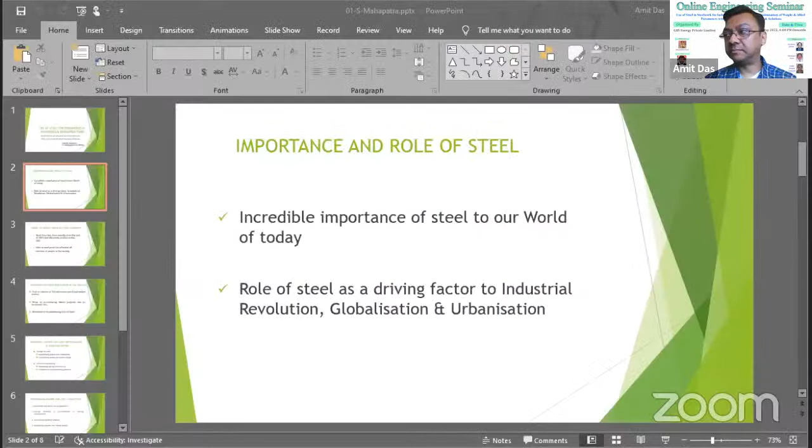As regards the role and importance of steel, it would not be an overstatement to say that the steel industry has always been at the forefront of industrial development and forms the backbone of any economy. Steel is said to be the wheel of the moving world, being the most important driving force for prosperity and welfare of mankind in this sustainable society.

But the worry is that the price of steel is rising very fast worldwide. Prior to the outbreak of COVID-19, the rise in steel price was there, of course, but it was steady, and it could have been predicted. It was very much predicted. But there has been an unprecedented price hike of steel during the last 2 years of the pandemic regime.

In certain countries, steel price had jumped to 200%, and hot rolled coil touched a record level of 300% increase. And as already mentioned by some of the speakers, in the Indian market, sections and bars have increased by more than 25%, and the increase of HRC is around 30%.

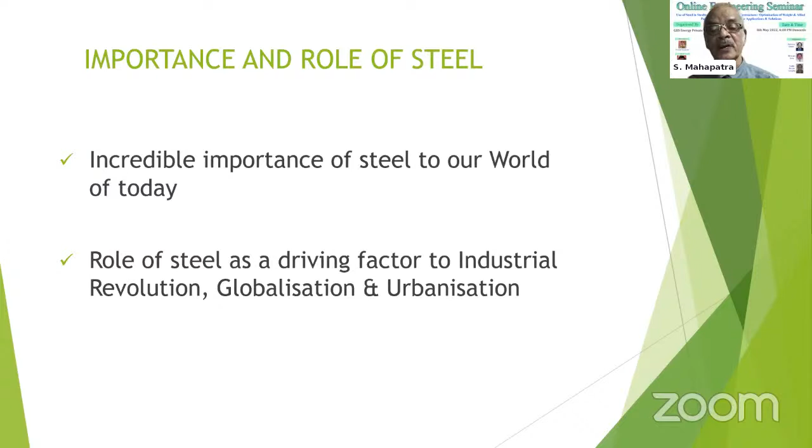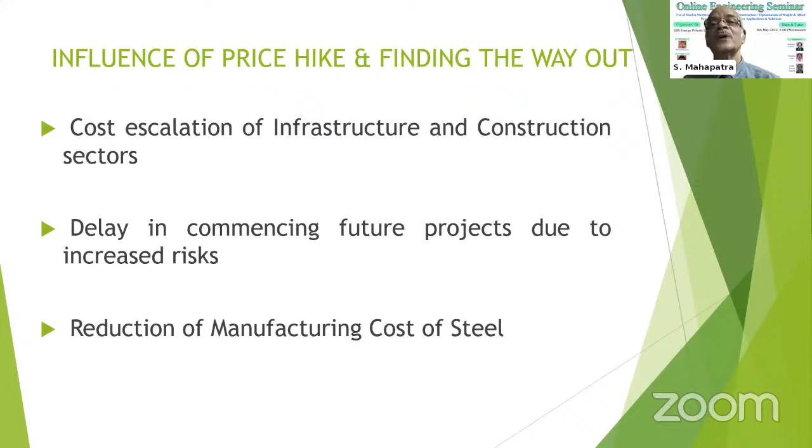So we can discuss what aspects contribute to bringing down manufacturing and production costs, the trend of rising price in the industry, and different aspects of cost optimization of manufacturing. Production costs are contingent on various factors, and finding the right ones for application of cost cutting, without damaging product quality or business reputation, is the desired methodology to reduce cost. Let's discuss some of these aspects.

Design and engineering: the design phase contributes significantly to the overall cost of the product. Optimization needs to be focused on engineering analysis, concept design, architectural design, and detail engineering. As regards engineering activities, using proper part tolerance - tolerance being the degree to which exact dimensions can vary - the optimization of tolerances saves material and reduces cost.

Another aspect is using hollow structures. Adopting structural elements such as ribs and gussets provides significant strength to thin-walled pipes and thin-walled parts. This will save a lot of material also, thereby reducing the cost.

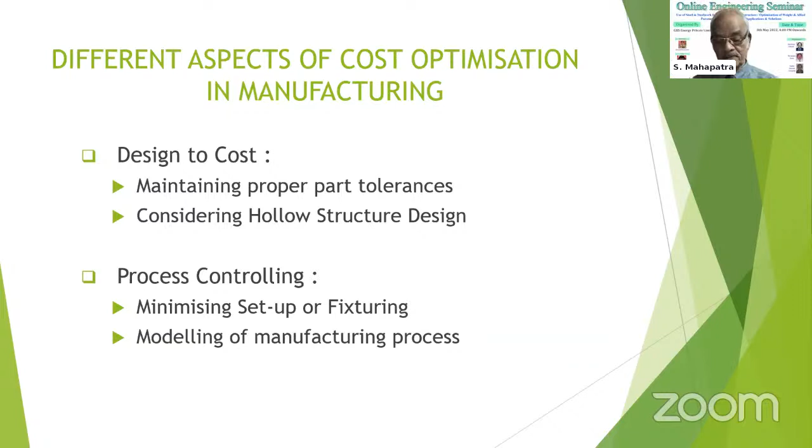That will save a lot of time, and so the cost reduction will be also. In addition to process and manufacturing, design and engineering, there are some other allied activities also in a steel plant which can be considered suitably for reducing manufacturing cost. One vital aspect is recycling and reuse of byproducts. Within the steel production cycle, several products like slag, sludges, scales, dust, etc. are produced, some of which are directly suitable for internal reuse, and others can be separated in a fragmented way for external use.

And energy auditing and optimization of energy consumption. The steel manufacturing processes are highly energy intensive. Share of energy cost in the total cost of production is quite substantial. So controlling energy consumption through carrying out the energy audit shall enable reduction of production cost substantially.

Maximizing the quality control. Main goals of quality control are to ensure customer satisfaction by delivering defect-free products and radical reduction of defect rates in production. Controlled technological processes are the most important way to reach these goals, and by way of that we can also save a lot of cost in manufacturing cost, particularly reducing the quality cost. Otherwise, the same thing has to be done again.

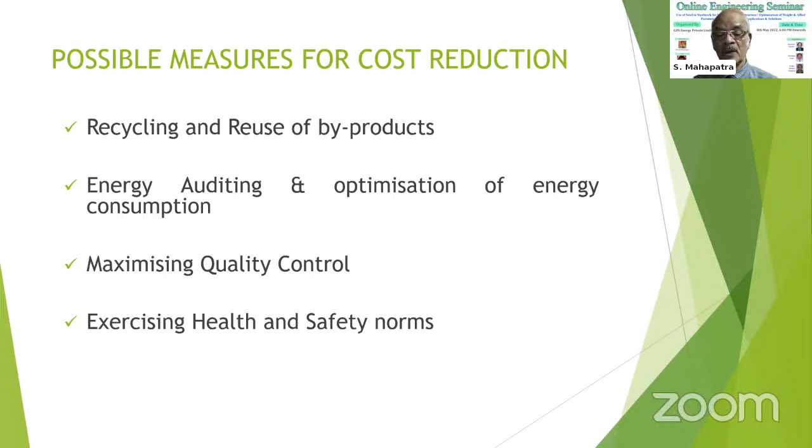Lastly, regarding price reduction options, to bring down the overall steel manufacturing cost, choice is usually either cost cutting or cost optimization. Cost cutting programs typically deliver short-term tactical gains; it's a one-time operation. Whereas cost optimization entails a systematic and sustainable method to manage priority costs, ensuring that operational capabilities of various functions are not affected. To conclude, cost optimization is a very efficient tool for managing production cost, ensuring effective demand management, better skill management, and better product quality.

This is the first thing which came to our mind: India is producing 110 million tons per year, and if we take around 60 rupees a kg or 60,000 rupees per ton, the value works out to 6.6 lakh crore, and 5% of that is 33,000 crore. This is material cost. Plus fabrication, transportation, and erection, totaling around 50,000 crore. So the main thing is 5% saving in steel weight, a rough saving in a year is around 50,000 crore.

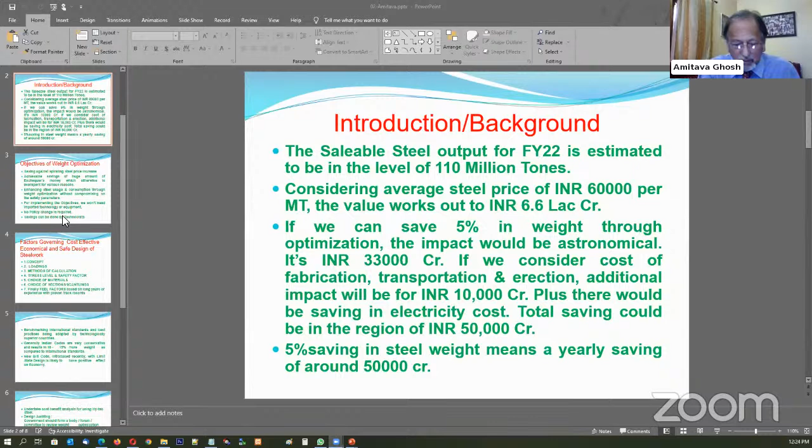So what are the objectives of this weight optimization? First, saving against spiraling steel price increase, which the other speakers have told. Next is achievable savings of huge amounts of exchequer's money, which otherwise is overspent for various reasons. The third point is enhancing steel use and consumption through weight optimization without compromising on safety parameters. Next, for implementing these objectives we don't need any imported technology or equipment. No policy change is required. Saving can be done by technocrats. In fact 5% saving, everybody will agree, is not difficult, you can do it very easily.

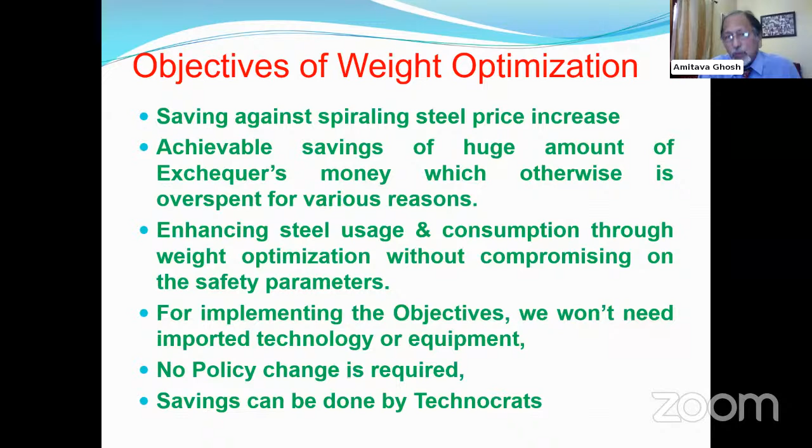So I'll give you the factors governing cost-effective, economical, and safe design of steelwork. How do we design this? The first point is concept. If we change the concept, we can do some savings. Like two isolated tall buildings, if we connect them on top, the weight goes down. Or in a modern power plant where the chimney, cooling tower and FGD are in the same place, with a change in the layout and concept we can reduce the load.

Next is the loadings. We consider loadings, and sometimes we consider more because we do not know. If we know the level of loadings properly, then we can optimize. I'll give an example. I have seen a container crane where the design is based on the value that the container is 75 to 80% loaded, because research shows that all over the world, a container is never 100% loaded. And if sometimes it is loaded more, the motor or structure can take that overload. This is how they are doing the optimization.

Next is method of calculation. Earlier it was manual, and now with software we do a good calculation and save. Next is stress level and safety factor. There is a permissible stress, and the stress level we can theoretically go up to.

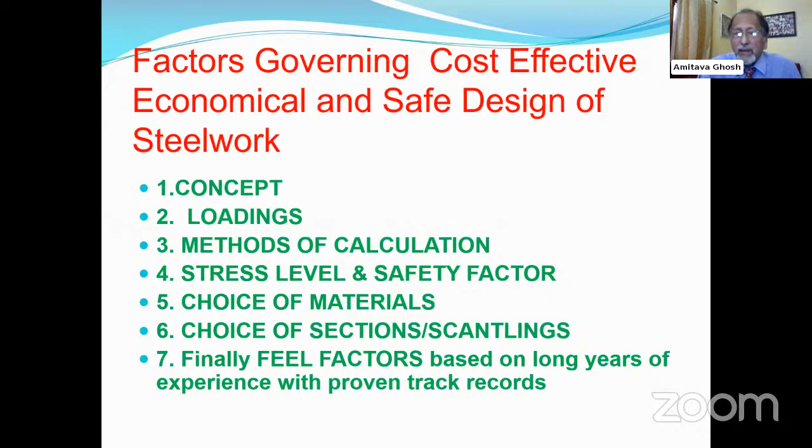And finally, the most important is the feel factor. The designer's feel factor is very important, what should you do. It is beyond calculation, whether this is okay or not. This comes with long years of experience with proven track records, like old doctors who, without investigations, could tell a lot of things. That feel for the whole thing is very much required to make it economic. We go to the next, Amit.

So, benchmarking with international standards and best practices adopted by technologically superior countries. Generally Indian codes are very conservative and result in 10 to 15% more weight compared to international standards. I have heard this when I used to go abroad. Those people used to say that now the BIS code is recently adopting limit state design, which is likely to have some positive effect on economy.

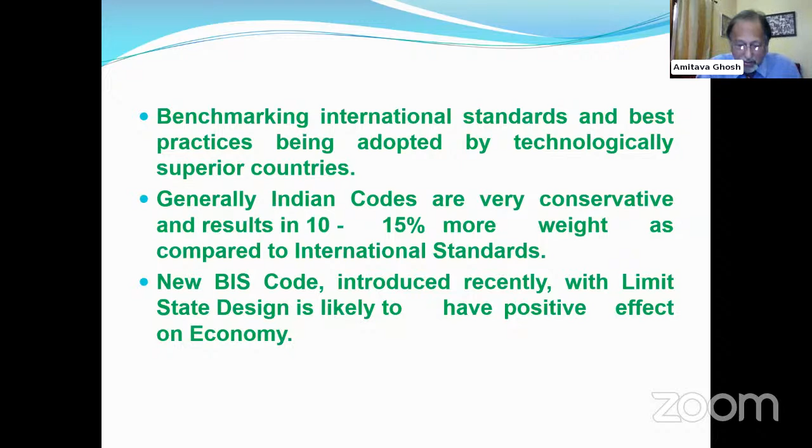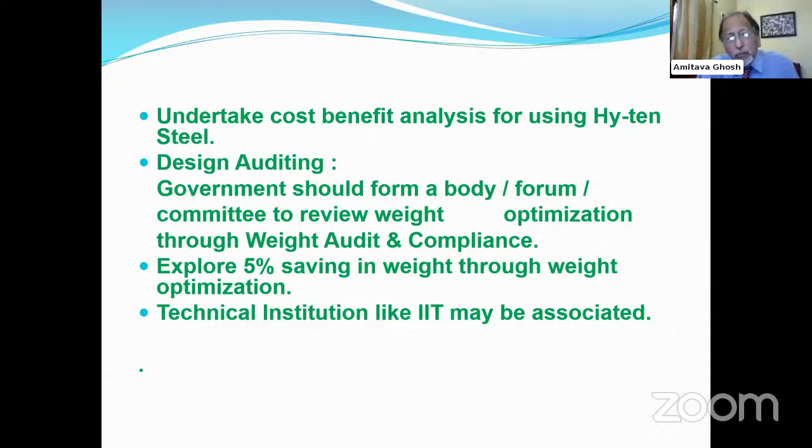So what do we do? I think whether the weight is more or less, one should see through weight audit and compliance and explore, not just a 5% saving in weight through weight optimization which is nothing. Technical institutions like IIT may be associated. Next.

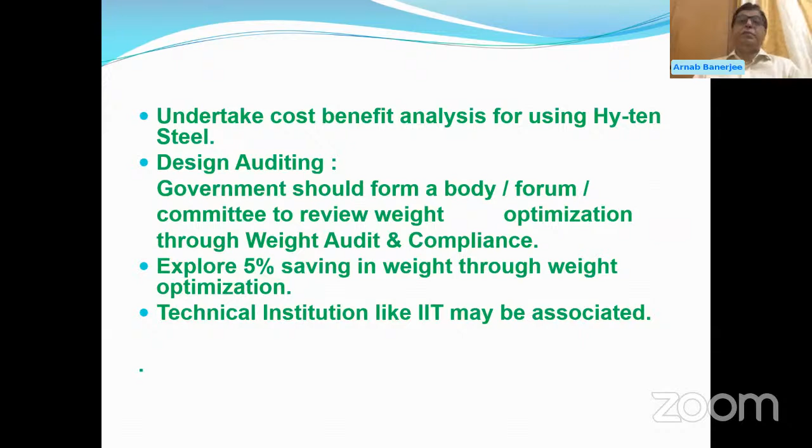Next slide, Amit. Slide number 7. Now I'll come to a very important point.

First of all, for critical applications, weight reduction should not be pursued. But we know this is the field of the designer, and this is the area where we can try and achieve it.

Believe me, there is no expiry date for weight optimization.

I can give you one example. In Purulia pump storage project, WBSEDCL could not give the site for 1 year. During that time, the hydromechanical company Mitsubishi utilized the time to do the work.

The most important and last point is that the mindset towards designers needs to be very positive and supportive, like in developed countries. Only then can we achieve all these steelwork savings.

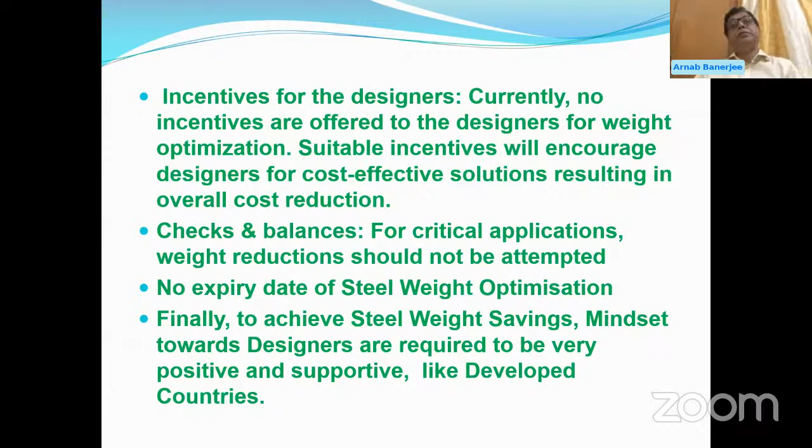The last point is about the people who will not be in favor of this. One is the consultant, who probably gets more money out of higher project cost, so they will always increase it.

Number two would be steel users or steel producers. They might think their steel sale will be less, but it is not true. If you see any retail market, every day they give discounts, but overall sale is more. I think if steel price level is less, there will be more use of steel, which we want.

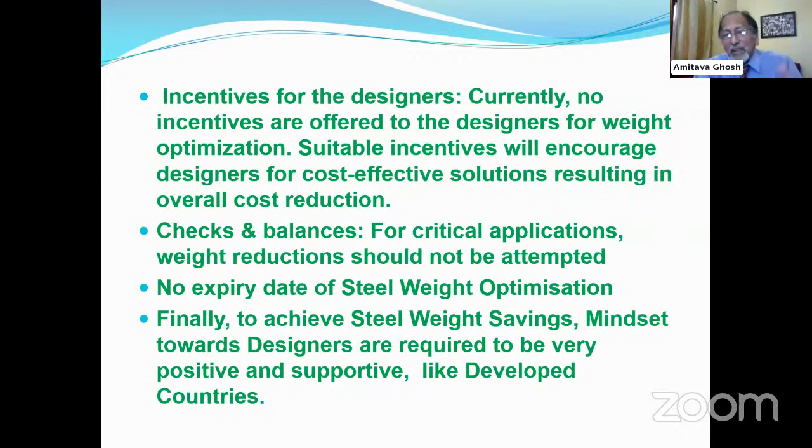So with that, I'd like to thank everybody, and next we can go to the next speaker.

In the meantime, what we understand is that everybody is positive regarding optimization. That is the buzzword, and that creates one thing: that we are not misutilizing any of the material, any of the time, any of the cost. That is what optimization says.

Now I would like to highlight certain points regarding design. Where are we at this very moment? How is India geared up for helping us in optimizing our designs from the codal point of view? Next slide, please.

Till 1984, we were involved with the method called working stress method. That was 37 years ago. And in 2007, 14 years ago, we were gifted with a new sort of design, which is called the limit state design method.

Why this change? The working stress method was quite foolproof, so why limit state method? The main objective, obviously, was optimization, not only of weight but of all other parameters which were developed at that time through research and development carried out by the premier institutes of India. So what is limit state?

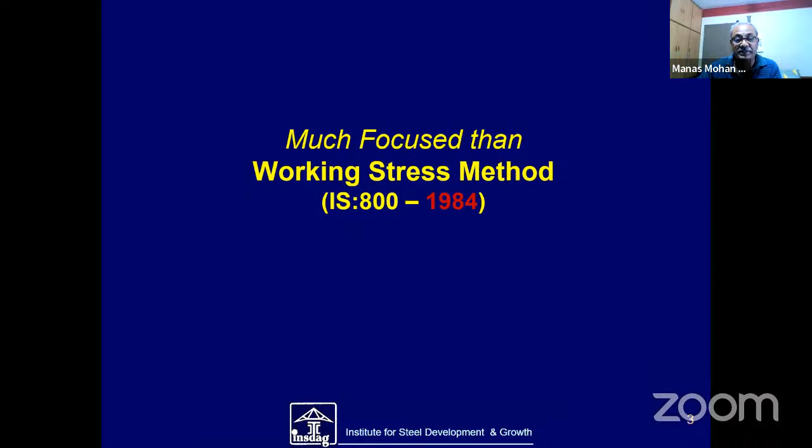Next slide. Limit state, we won't delve deep into it, but it is the result of advances made in structural steel design. These advances were incorporated into the code over the years, helping in a more rational and reliable estimate of the collapse load.

Whenever we design, what are the parameters? Number one is the uncertainties. If the uncertainties can be calculated statistically and probabilistically, and converted to certainties, then the solutions become much easier. So from working stress method to limit state method, this was a giant step in finding out the range of uncertainties to its extent. Next slide, please.

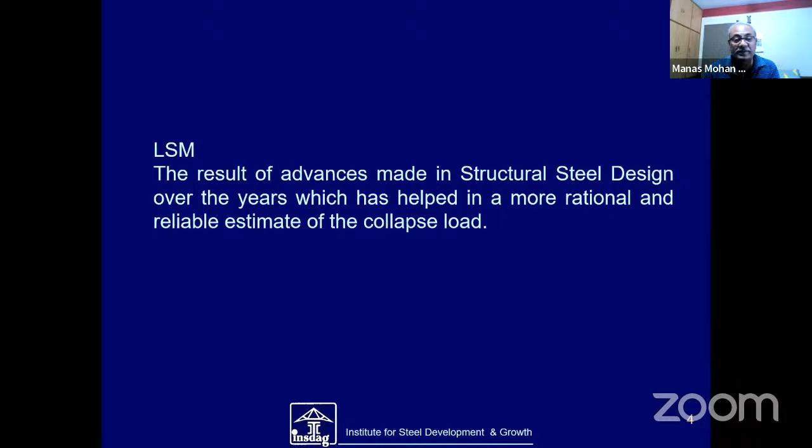I quoted from the code itself, IS 800-2007, the revised standard. Why has this code been made? The code itself states that the revised standard will enhance the confidence of designers, engineers, contractors, technical institutions, professional bodies, and the industry, and will open a new era in safe and economic construction in steel. So the main motto is safe and economic construction in steel. With this, the limit state method was introduced in the year 2007.

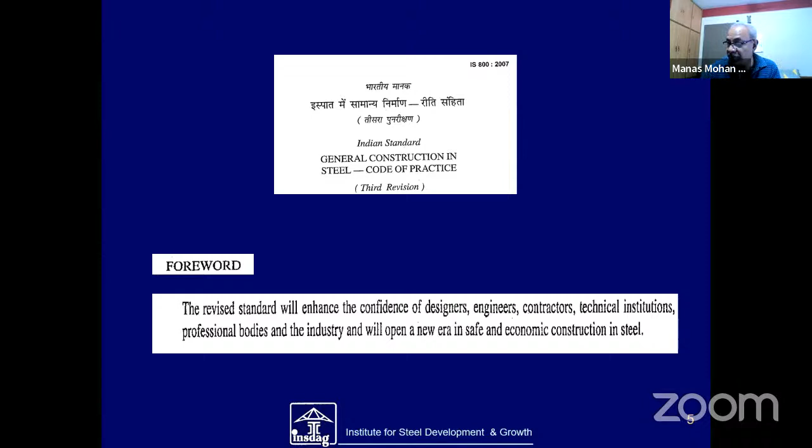Next slide. So now, 2007 is quite old. 14 years back this was launched, but after that also there has been much development in structural steel design. A 14-year gap is a long gap.

In the meantime, the Bureau of Indian Standards brought out another codal provision called the National Building Code in the year 2016, where they modified the chapter on steel. In other words, IS 800-2007 has been modified and incorporated into National Building Code 2016. That is one development. The second development is that the BIS committee discussing IS 800 has again been formed, and IS 800 is taking a new shape, which will be out within 1 or 2 years. So there has been huge development.

Now coming to the parameters. When we talk of limit state, there are two aspects: one is strength and one is serviceability. The number of parameters under strength are 1, 2, 3, 4, and 5, and also under serviceability it is 1, 2, 3, 4, and 5. So there are 5 parameters in strength and 5 parameters in serviceability.

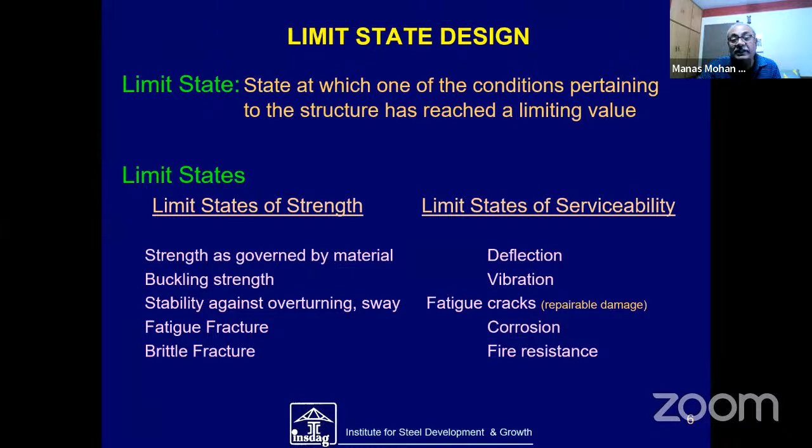Let us see what was there during the working stress method. Next slide. In working stress method, strength had only one item, that is permissible stress. The term is working stress design, so the important factor is stress. Under this working stress system, strength had only one parameter, and serviceability had only one parameter also. So what we understand is that the one parameter which was there in working stress has now been converted into 5 parameters. In other words, we are entering into the micro level of designing.

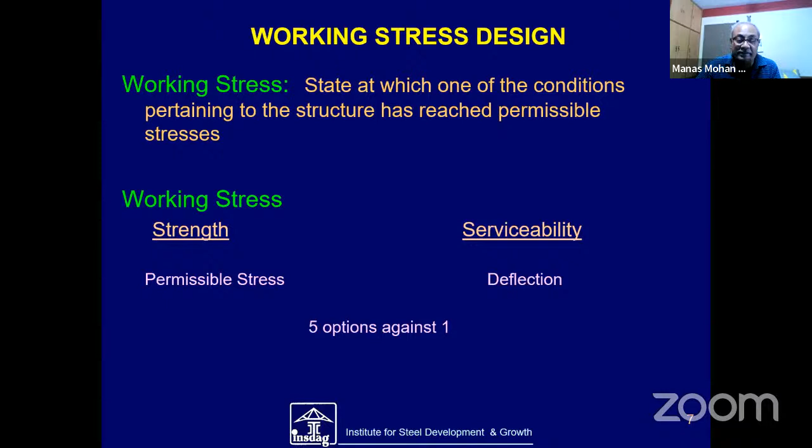Similarly, the resistance is reduced. The resistance, say yield strength of 250 MPa, is never thought that 250 MPa is there in the material. It is reduced by another factor.

So these two factors have been included in the basic equation of limit state method. Let us see. One factor is called gamma F, the load factor. It is a multiplying factor. If your dead load is 5 ton, we multiply it with a factor, say 1.1, so 5 into 1.1 is your actual design load.

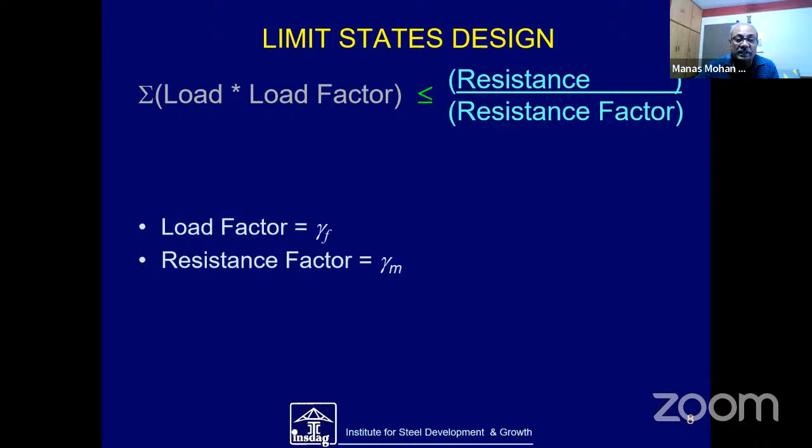So here we find one factor in working stress. The actual stress, whatever is coming, has no modification. And the permissible stress in the other part, which is called the resistance in limit state method, has a reducing factor. Say, for example, if it is a tension member, then Fy, the yield strength, is reduced by a multiplying factor of 0.6. So 0.6 into Fy is the permissible stress.

So what happens? One part of the equation, or the stress, is being reduced. That is only a factor, so as to take care of the uncertainties. So here we find that the number of factors is 1, whereas in limit state, the general equation gives the number of factors as 2. So 2 options against 1 in limit state.

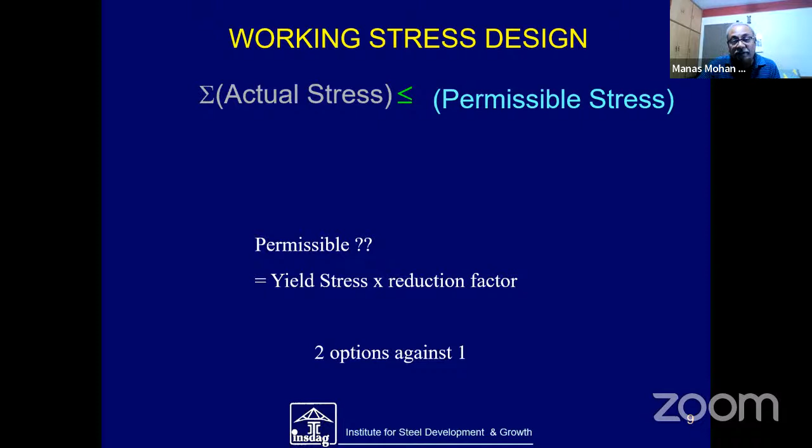This is from table 4, which is huge, we won't discuss it. You see the combinations. In working stress method, the combination of dead load plus live load plus crane load had only one factor, that is 1. Whatever be the load, it is not increased by any other factor, it is only considered as 1.

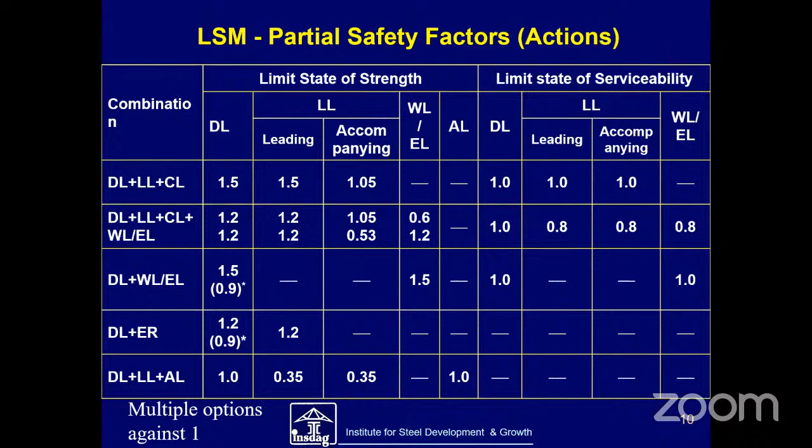But in limit state method, it was found that each and every factor or parameter is to be increased by a certain factor, which is not equal. Dead load 1.5, live load should be 1.5, and CL is crane load, it is 1.05. So there are certain combinations with different numbers of parameters, which was not there in working stress method. Whether it is a crane load, a wind load, a seismic load, or no load, the factors were all the same, that is 1.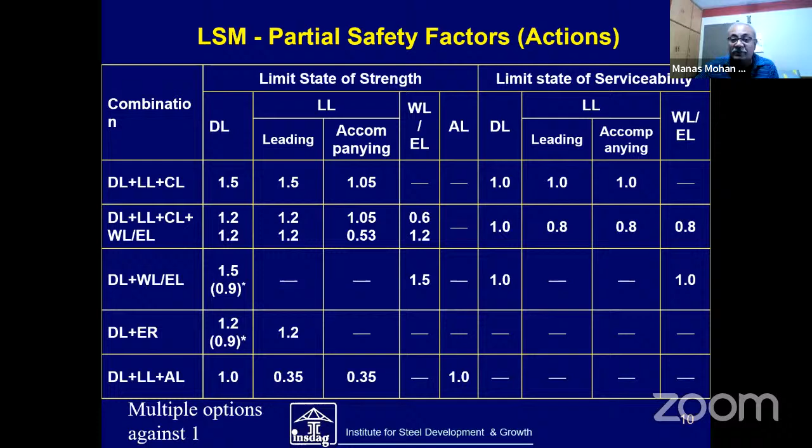But in limit state method, that was not allowed. According to the importance of the factors of the loads, the factors were changed, and we find a huge number of factors in this table. So multiple options have been given in limit state method against only one option which was there in working stress method.

Similarly, the resistance part, which we have spoken about, has also a number of factors, 1.1, 1.1, 1.25, according to various conditions. And then for connections, the resistance factors are also 1.25 and 1.5. This was not there in working stress method.

Working stress method, in fact, had only one factor which told that you can increase the permissible stress by 33% when the combination is dead load plus live load plus wind load, and wind load is not the prime load. There was no other mention of any sort of factors in working stress method.

But in limit state method, we find a plethora of factors which give different values for different conditions of loading. So what does it mean? It means that limit state method is eyeing for a micro level designing concept, which will ultimately yield optimization. That is what limit state aims for.

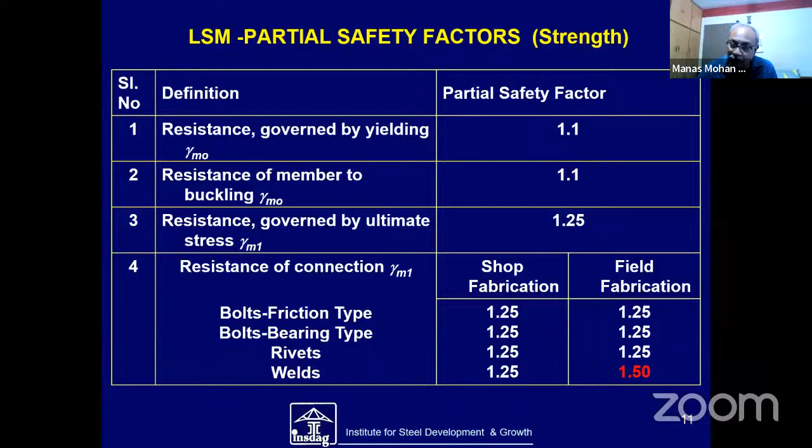So here also, in the working stress method, the factors were very, very few. We have already discussed this one.

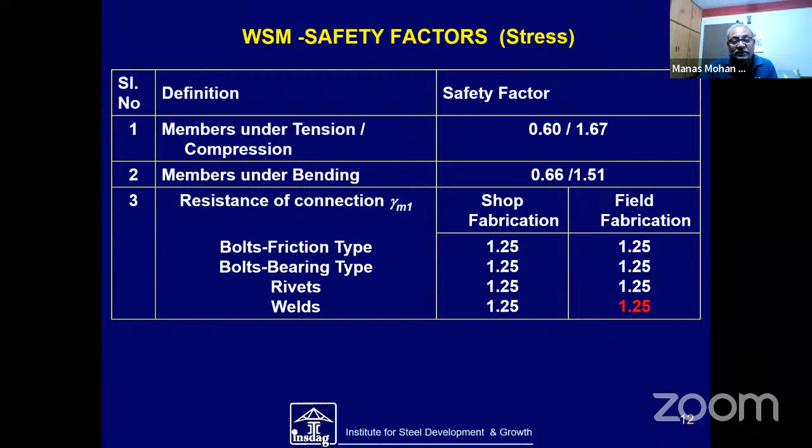Coming to deflection, if you recall the 1984 version of working stress method, the limiting deflection had only one value, L by 325. That was sacrosanct for loading of a purlin. It was sacrosanct when some other heavy loads, members for heavy loads, were also considered. Only for cranes was the deflection pattern different, and there is no change in the limit state method.

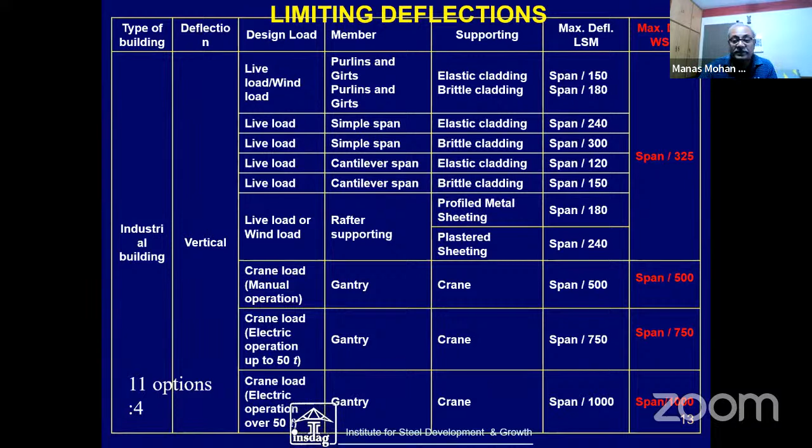In a nutshell, the options of limit state has 11 number of options, whereas in working stress method, there was only 4 options. Similarly, you see the number of options is 6 for limit state method, whereas in working stress it was only one sacrosanct value, that is L by 325.

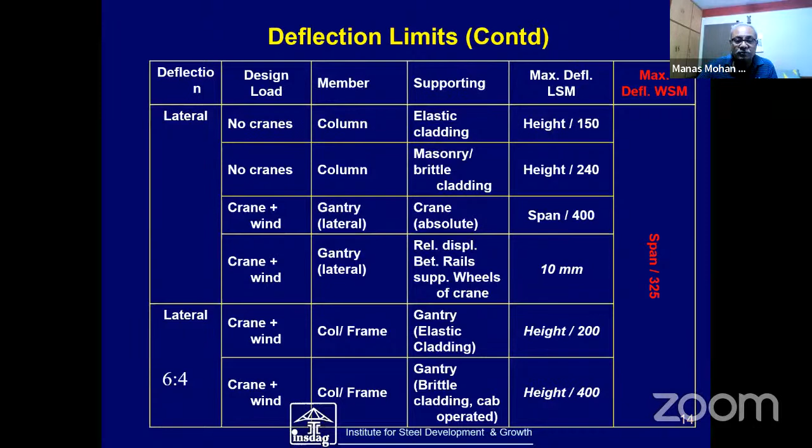Similarly, let's give this one. It only gives you the example. Next slide, please. So what does it mean?

Limit state method is much more detailed and delves into the micro level for designing, optimizing the designs by rationalizing the factors of safety for strength, stress, and deflection under various loading conditions. Economy and optimization is the most important criteria here.

In most cases, if we have designed, say, 50 cases, 45 cases have proved that it is much more economic when we use the limit state method. There are certain situations where the working stress method is economic rather than the limit state method, but that is in a very small domain.

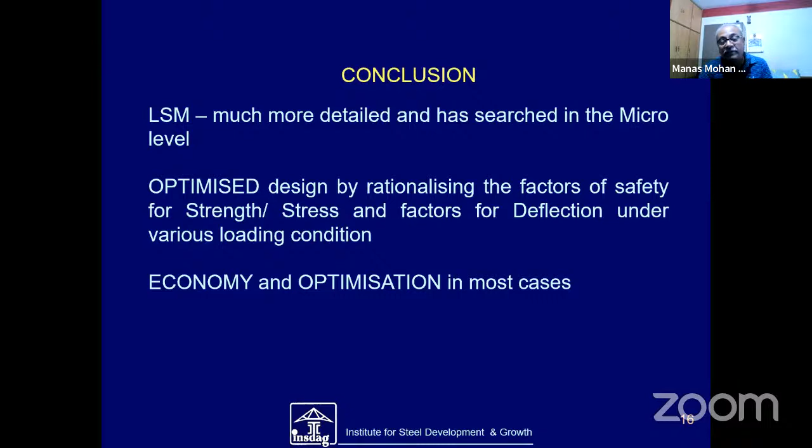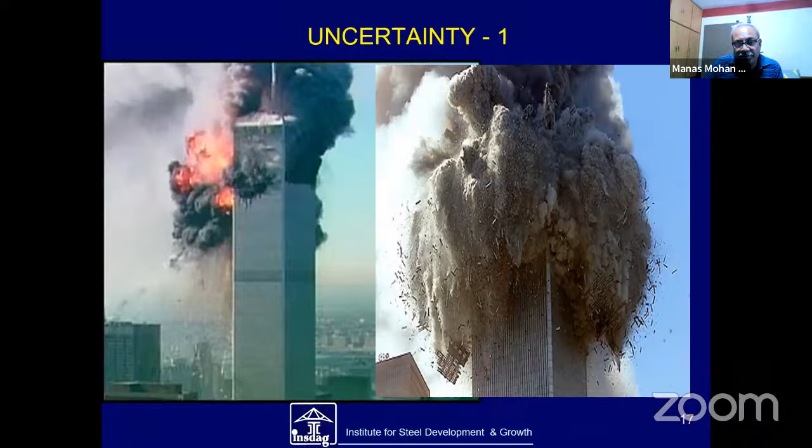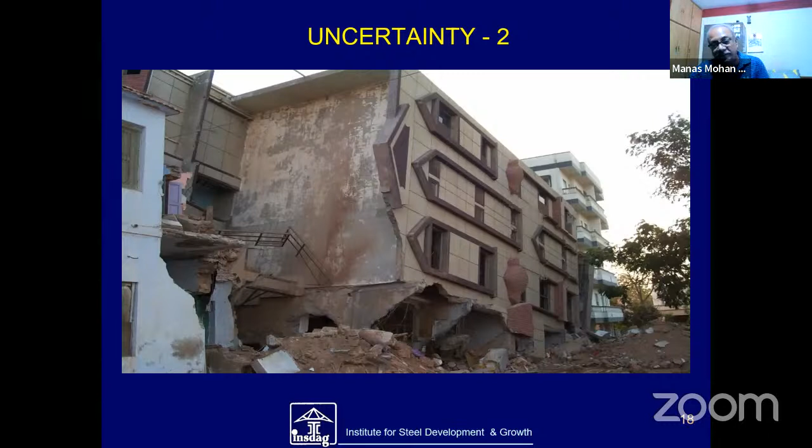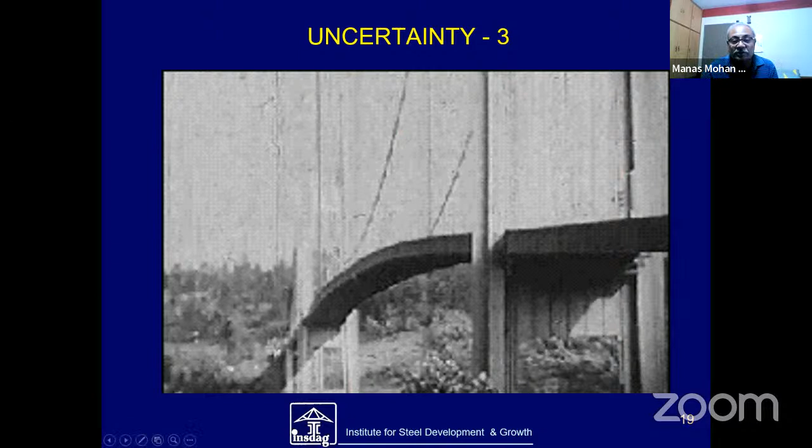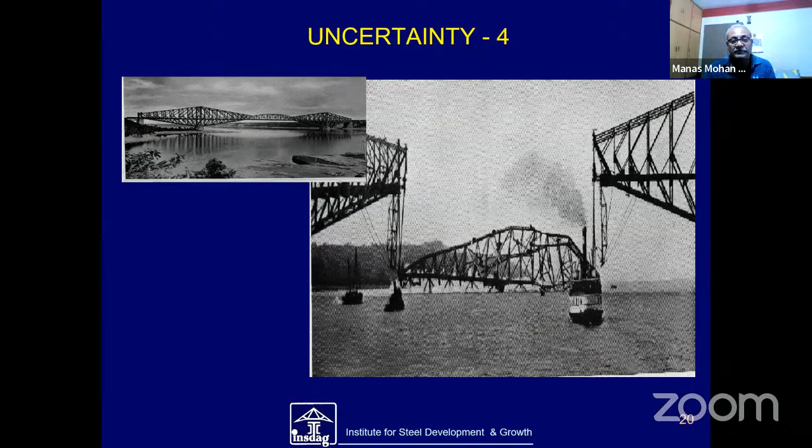So with this, we end. I just wanted to highlight that the limit state method, which is now the in thing in Indian structural steel design, delves into areas where designing can be done at the micro level with the idea of optimizing structural steel design.

As Mr. Arnab told, I worked in the steel industry for 38 years, mostly in marketing, and in the course of interaction with various project authorities, I gained a lot of knowledge on weight optimization. I would like to share two cases here which I experienced during my service period.

The first case is the bridge workshop at Northern Railway, Lucknow. Now, I was a frequent visitor to RDSO in connection with development of some new sections for the wagons.

So in one such meeting, the team of RDSO requested me to meet the chief bridge engineer. In fact, they organized the meeting the next day in the office of the chief bridge engineer, where RDSO and RITES officials were also present, along with the chief bridge engineer and his team. During this discussion, the chief bridge engineer said that with the emerging trend of high-speed trains coming up in another 5 to 10 years' time, they had changed the design criteria to accommodate this kind of change.

So accordingly, they asked us to supply ISA 150 by 150, in 12mm, 16mm, and 20mm, in a specific length of 12.5 meters, and to supply the entire quantity in IS 2062 Grade B.

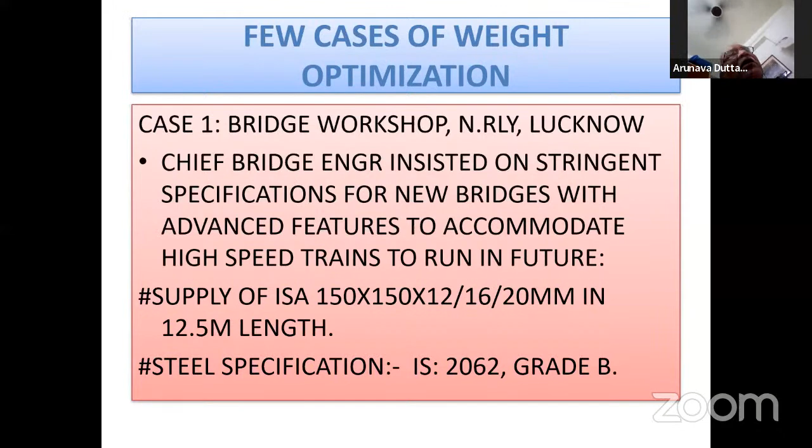We expressed our difficulties, as it would drastically reduce the yield because there would be generation of short pieces where disposal would be very difficult in that special quality.

Railway officials said they wouldn't be able to accommodate splicing at all, because if splicing is there, then there has to be an external strengthening mechanism which will add weight to the bridge by 7 to 8%. So they kept insisting on sticking to this specification.

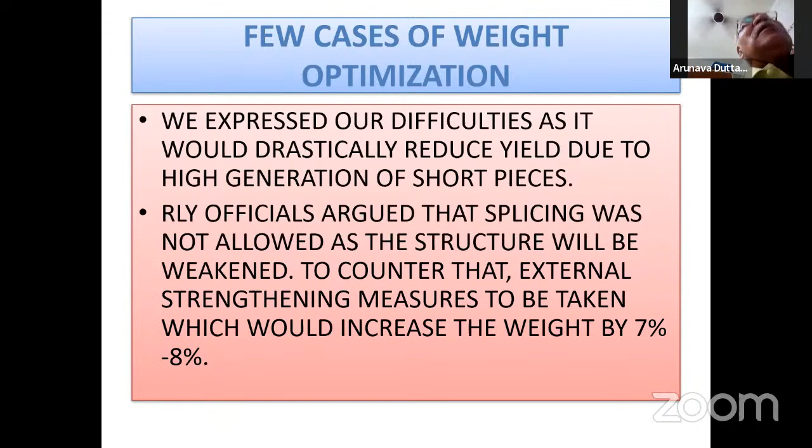So I went back to my plant officials and discussed with the plant officials, the mills, the melting shop, and all those things.

There was heavy commotion, and finally it was taken up at the highest level, and the management agreed that though it would be very challenging, the job would be taken up.

So we conveyed our acceptance, and railways also helped us in disposal of the short pieces for use in various zonal railways and bridge workshops, and also the wagon industries and wagon repair shops. After we started supplying, other zonal bridge workshops started placing their entire order for structurals with us, and so to say, we became a kind of captive supplier for them.

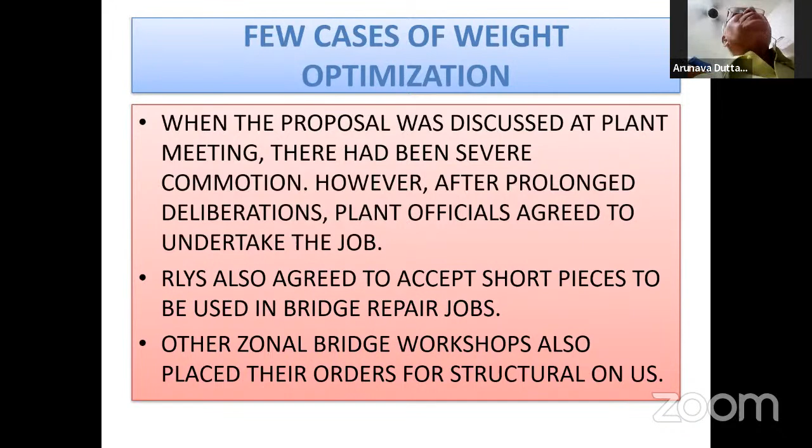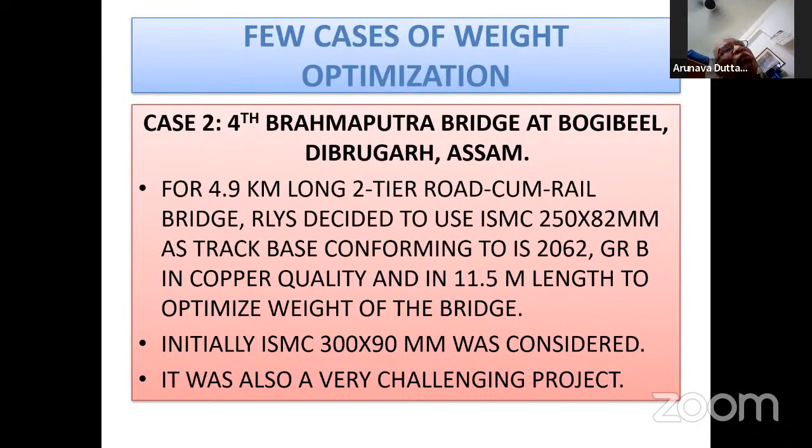Now, the second case is the 4th Brahmaputra Bridge at Bogibeel, Dibrugarh. You are all aware that this bridge was a 4.9 kilometer long, two-tier rail-cum-road bridge. Initially, for this bridge, they had considered ISMC 300/90 as the track base, but later on, to optimize the weight, they changed it to ISMC 250/82 in grade B copper quality, to be supplied in 11.5 meter length. So it was also a very challenging project.

So we accepted the challenge after a lot of discussion at the plant level, and officials of Railway Board also helped us for disposal of the short length pieces by asking the general bridge and wagon repair shops to make use of the short pieces as far as practicable.

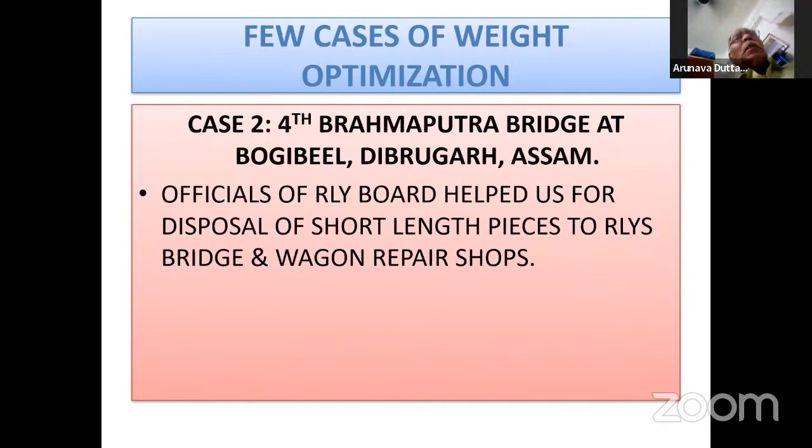Now, the situation is something like this. We were having at that point of time the blast furnace, SMS, then ingot route, ingot bloom, and billet route for our various sections and TMT bars. It was very difficult to minimize the yield losses. But there had been various innovative steps such as adjusting ingot heights. It is very easy to say, but very difficult to do. Change of hot top, and finally...

After supplying, we found that we had higher order volume from the railways, and our NSRs also had gone up. Net sales realization had also gone up.

So the point I'm trying to say is that most steel producers since then have updated their manufacturing facilities. In view of this, my suggestion is for the designers, for the consultants and the users to demand for more stringent specifications and supply in fixed lengths and closer weight tolerances from the steel producers.